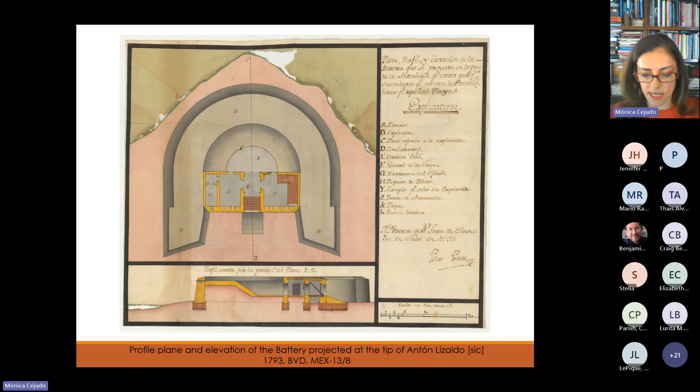In addition to the ability that military engineers had to draw, they had to follow the guidelines of different ordinances, from the method of drawing maps and forming plans, as well as the participation of the engineers in military works.

This architecture became transcontinental in the mid-16th century. With the rise of piracy in the Americas, the Spanish crown saw the need to build structures and protect the ports, which became true walled cities.

The value of the Spanish empire's system of fortifications lies not only in constituting architectural heritage, preserved as an example of military architecture, in sites like Cartagena de Indias, Campeche, Havana, San Juan in Puerto Rico, Santo Domingo, Portobelo, Panama City, Santa Marta, Rio Hacha, Florida, the Araya Peninsula, Isla de Margarita, and Veracruz, but also in the fact that its construction required European engineer models and the interpretation of the military treatises of the period.

A single military engineer would often be responsible for projects in many different localities, giving rise to typology and constructive invariance.

They transformed settlements, like here in Portobelo. Fortifications were laid out on a terrace that dominated the bay, thus constituting a defensive system with parapets, batteries, and redoubts.

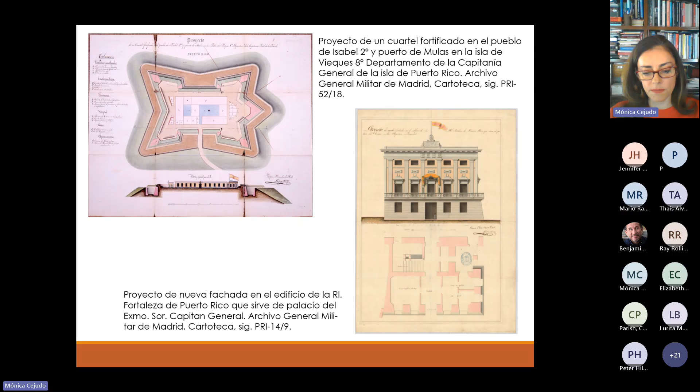The system of defenses constructed in Puerto Rico followed the model of military architecture developed in Europe during the modern age. The nomenclature used in the fortifications responded, as in all Spanish possessions, to the role of defender of the faith, so they had religious names in order to endow them with maximum protection.

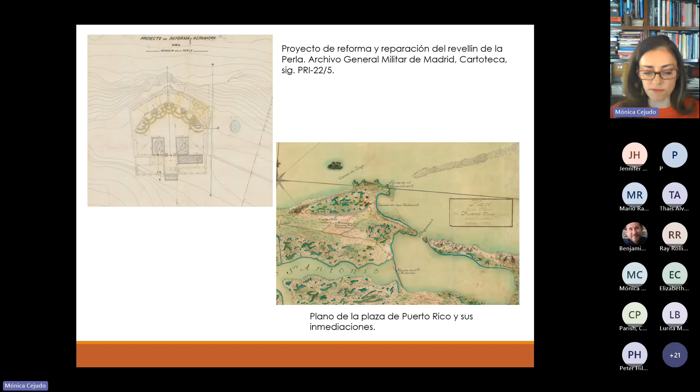During this period of 395 years, numerous defensive works were built and existing ones were reformed to adapt them to new tactical and strategic needs. When the defensive system lost the importance it had acquired during preceding centuries, this caused some fortifications to be dismantled or even demolished.

In New Spain, the most important forts were those located along the coast. The only inland fort was that of San Carlos de Perote.

Cartography and the art of poliorcetics were at their height, as can be seen in the defensive evolution of San Juan de Ulúa, the first Mexican fort, built by Hernán Cortés in 1519 to protect Villa Rica de la Veracruz. San Juan de Ulúa is located on the island of La Gallega, facing the city of Veracruz.

Plans for a fort were drawn up with four bastions, making use of the existing Muro de las Argollas. In these plans, one can observe the church, the hospital, the plaza, the bridges, and the mayor's residence. The fort then began a long history of incorporating interventions and additions to improve its defensive capacity.

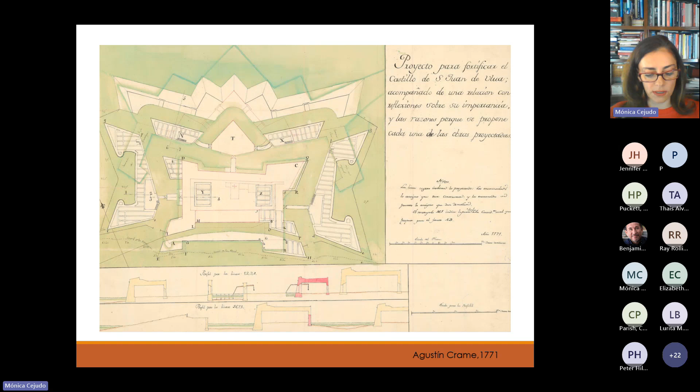Its defensive technique was finally perfected with Agustín Crame's detached exterior works, making San Juan de Ulúa a well-rounded model of the military architecture of the time. This military enclave proved itself by holding its territory, which was admittedly lost at certain moments, but due to pacts between the Spanish crown and England rather than military invasion.

Another reason to preserve this architecture is that it is a product of trade relations that involved sharing objects that create culture with Asia. Remember that New Spain not only administered the lands within its borders, but also the Philippine archipelago. The first global trade route, known as the Manila Galleon or the China Ship, was maintained for 250 years.

It required the protection and safeguarding of the ports of departure for the merchandise crossing the Pacific Ocean. The Philippines exercised a cultural influence on the rest of New Spain, leaving its mark on decorative objects such as the use of screens or carved marble pieces with religious themes.

Plants and fruits such as Manila mangoes and African tamarinds, dresses, shoes, parasols, fans and scarves or paliacates, porcelain, piñatas, and rice, all of them took root in Mexican culture.

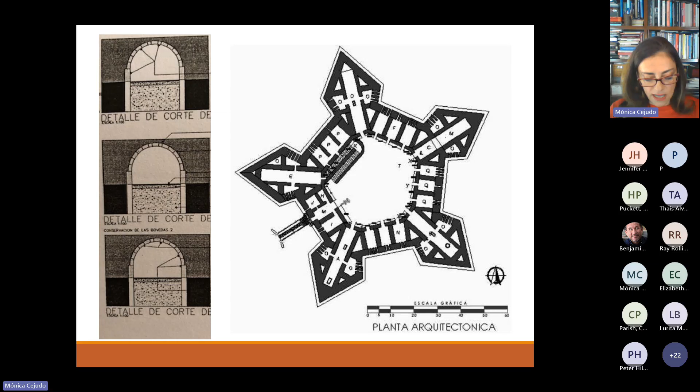Advances in the understanding of structural continuity were applied using fillings to better withstand the accelerations produced in this earthquake zone. Geometric rigor and design solutions create interior spaces resolved with barrel vaults.

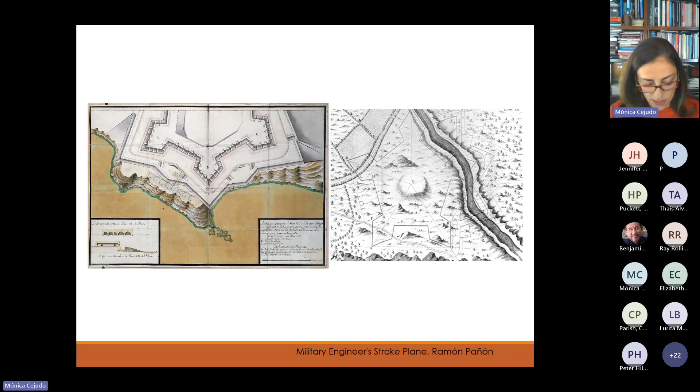Ramón Pañón drew up this perfect design for San Diego, regular in its proportions and magnitudes. One side of the regular star, with five bastions at its points, faces the sea and the other faces the land. The tops of the exterior walls are of special interest, made of stone with plastered finishes.

The Fort of San Diego is currently home to the History Museum of Acapulco. This contemporary use allows the building to stay relevant within its urban context and aids in its preservation.

Here, I feel it's important to say that we must avoid what happened in Mexico City, where these sentry posts and forts can now only be seen in the fantastic paintings by Carlos Nebel, who captured these military buildings as they were used to defend the city against the US Army.

The city walls preserve the unity and design of the historical center of Campeche from the 16th to the 21st century. Planned as a walled city, the most important port in the province of Yucatan was attacked by pirates. Its system of fortifications is an excellent example of 17th and 18th century military architecture. Campeche is the only example of a fortified city now in Mexico.

Bacalar was part of the General Captaincy and Court of Guatemala, although it was considered a second-order territory due to the climate, humidity, and unhealthiness of the coast, and due to the British presence on the coast of Honduras. They promoted the construction of forts such as San Felipe in Golfo Dulce, Guatemala, or San Fernando de Omoa in Honduras, and as in the San Juan River of Nicaragua. Sometimes these buildings are restored and given new functions, as with the shipyards of Veracruz, to guarantee their permanence and conservation.

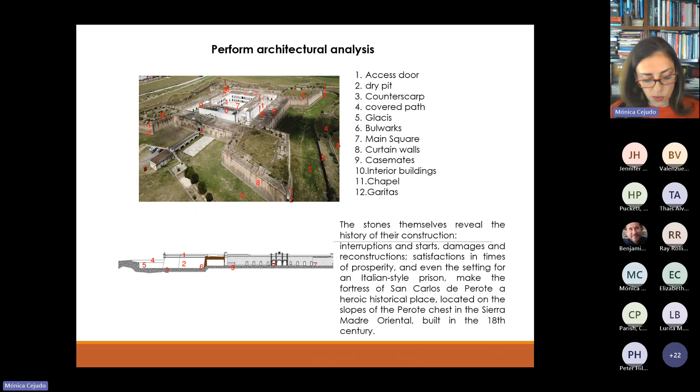San Carlos de Perote is a bastion fortification arranged in a regular square, each side 280 varas long. At its corners, it has 4 bastions aligned with the cardinal directions. 2 of the bastions have vault spaces that were used as subterranean powder storage facilities, and the other 2 are solid. One of them was blown up by the army to prevent it from being captured during the US invasion.

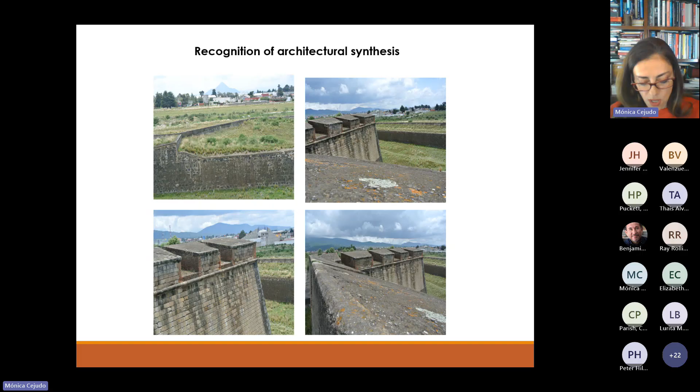The fort is accessible through a winding path that crosses 2 bridges over the moat, one fixed and the other movable, leading to a single wooden door frame in a classical style according to the Serlian canon, topped with a lunette made from chiluca stone.

On the inside, the axis of symmetry marks the 2 sides, with 4 buildings for lodging troops and officials on 2 levels. The parade grounds have perimeter arcades with semicircular arches. Within the main building, there is a chapel with choir, altar, and a space for the sacristy. A perimeter circulation path separates the buildings from the embankments, which also contain vaulted spaces.

The walls are mostly of masonry. They include irregular stones finished on one side to give the surface a finer look, or mixed masonry that includes quarried stones, river stones, and brick. They are all set in the wall using lime mortar. Lime was also used to cover the walls and arches. The bricks and lime were made in ovens specially built for this building.

The structure contains semicircular, elliptical, and tilted domes and segmental arches, and there are barrel, rib, lunette, and groin vaults. Some of the arches have carved basalt keystones. The columns are made of red brick on the base, with carved basalt capitals. The splaying of the embrasures is achieved through brick reinforced with basalt. There is an inscription of the 20th century intervention with the implementation of the rolling system of 1909, also known as the Porphyrian vault.

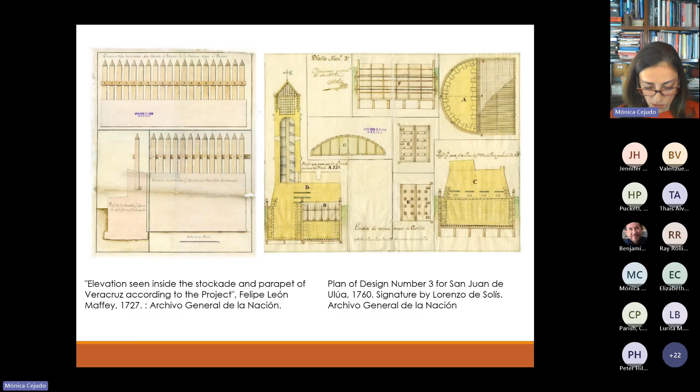The refinement and improvement of the works was reflected in the drawings that the military engineers left us. In the development of this defense system of the Mexican and Caribbean region, there were coincidences and discrepancies in the characteristics of the different constructions.

They tend to be symbols of the colonial past, which also strengthens their immaterial cultural component. Their value not only lies in their role as historical sites, but also in their structural, architectural, and aesthetic aspects. When considering their current uses, an appreciation and understanding of their historical value should not lead them to serve only as a backdrop to touristic activities.

In the case of coastal forts, such as Atares in Cuba, the natural environment must be preserved. In the case of Acapulco, the natural environment has been preserved, as has the view of the coastal side. But construction has been permitted too close and too high to the fort on the land side.

The importance of San Juan de Ulúa to Mexican history is overwhelming, and yet it is not recognized as a heritage site. Development has often led to attacks on forts that have been more destructive than those of artillery.

In more recent times, the primary problem is the container port with its gigantic cranes. But a bigger problem is the movement of enormous cargo ships so close to the building.

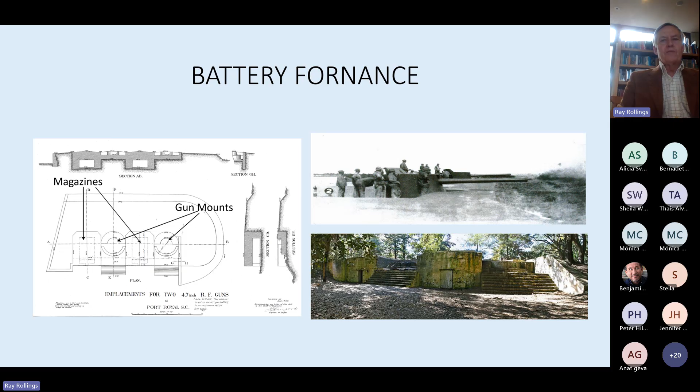Here we see Battery Fornance. It's a relatively small concrete section with a large sand embankment in front of it. You see the guns up there on the top right. And then down below, you see the current Fort Fremont as it exists today, with the 2 magazines where they stored the ammunition.

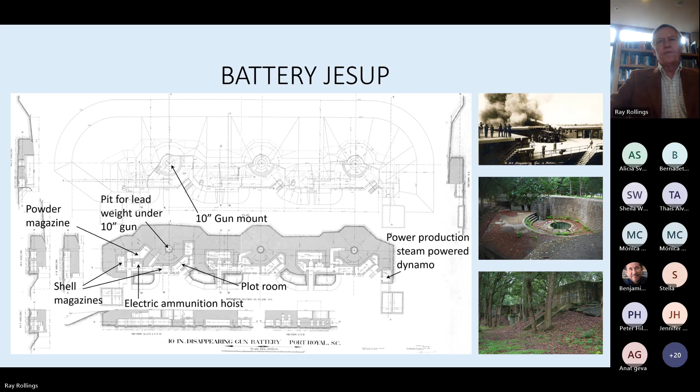This was built primarily with Rosendale cement. This is a natural hydraulic cement. These were not anything particularly new—they were in Europe in the late 1700s. It was also first used in this country probably for the Erie Canal.

In the 1840s, the Corps of Engineers did a large amount of work testing different types of natural cement in the United States. The cements that came from the quarries around Rosendale, New York, were selected as the superior source, so the Corps of Engineers would use only Rosendale cement. By 1898, the Corps had used Rosendale cement for 33 forts, 2 Navy yards, and 17 river, dam, and water projects.

In order to make this cement, you first quarry clay dolomitic limestone. You calcine this in a kiln at about 800 degrees centigrade, and then you grind it. This produces a fine powder that's got a very high pH. And at a high pH, silica and alumina in the clay—that's the contaminant in this dolomitic limestone—is leached out and is now available for chemical reactions.

That's why it's important that you have a dirty or clay limestone or dolomite rather than a real pure one, because you want that clay for these extra minerals. It will make a dicalcium silicate, which is a major cementing material for this. It's relatively fast setting, sets in about 30 minutes, but it gains strength relatively slowly. So we're only talking maybe 1,000 to 2,000 PSI when you deal with natural cement like this.

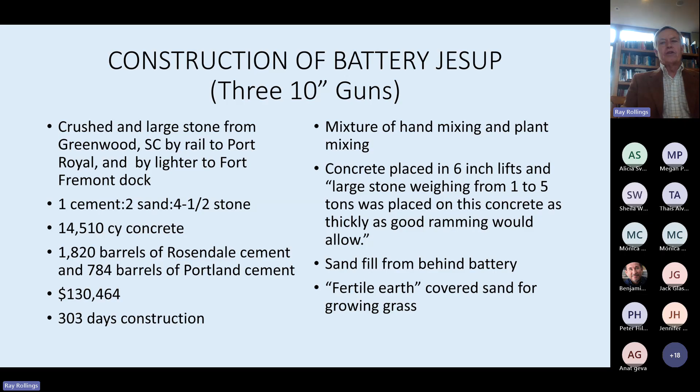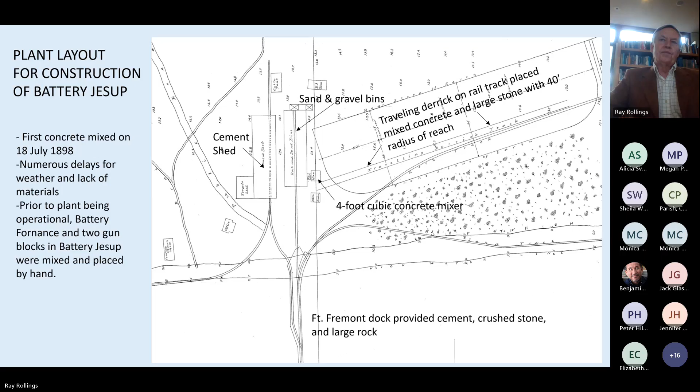The first thing is, when you look at the engineering notes from 1904 from their engineering school, they're debating whether the concrete mix should be dry, which some of the early testing in the 40s said you got the best strength. But to do that, you have to really spend a lot of effort ramming it into place. You get it to be creamy, essentially a semi-solid, or even a liquid.

The drawback, if you place it as a liquid, is that you have to have watertight forms so the cement and water doesn't seep out. It's not going to be until 1918 that Duff Abrams sets out his well-known concrete law, that the strength of concrete is a function of the water cement ratio. Essentially, the more water I add as a proportion of cement, the lower the strength. So the liquid type approach gives you a low strength concrete. The drier you place it, the higher strength.

In Georgia, normally what they would do is when they would place the concrete, they put a mortar parge coat on the top, on the outside, so you got a smooth, clean, creamy, good appearing surface. In this particular photograph, the sand in front of the battery has been stripped away, used for road construction. Now we can see the quality of the consolidation in the concrete.

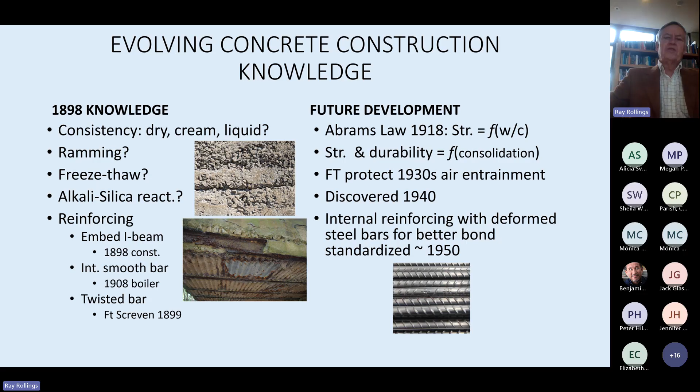The Navy Yard moved to Charleston, South Carolina. This was a political move where a new dry dock opened in 1909. At that point, Fort Fremont no longer really had a mission. The troops were transferred out in 1911. It was put up for sale in 1920. Beaufort County acquired the concrete batteries in 2004 and built a history center there in 2021. In 2022, we had over 4,000 visitors, even though it's a fairly remote, small location. We've been pleased with how many visitors stopped by to see it.

So what's the significance of Fort Fremont? It's really a little tiny snapshot in time at the opening of the 20th century. It's important in the sense of military technology and political responses to that technology. It was how we reacted to the threats of the time. There's a whole history to that part of the story because Mary and I were both engineers. We were intrigued by the challenges of building these big concrete fortifications in a location like this.

And we're seeing a lot of changes. We should not think of this as primitive construction. They produced electricity there for lighting in the magazines, for electric engines, and for floodlights. They had that in 1899. Beaufort would not get electricity until 1910, and St. Helena Island around the fort would not get electricity until the mid-1930s. They had telephones that they used for fire control. They had the forerunner of a fax machine. They had running water and sewage. So in its time, it was very much a state-of-the-art facility.